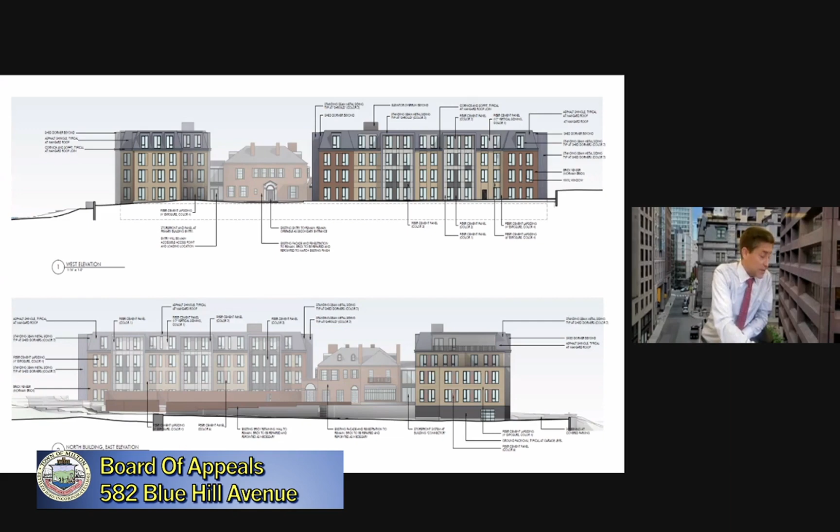Now, Mr. Bomer's suggestion was to cut the ends off of the North Building.

The applicant responded to the first suggestion, but not the second. It determined that cutting the western end of the North Building would result in the displacement of 12 residential units. But instead of simply reducing the size of the building, it is proposed to relocate those units to the West Building.

This means increasing the height of the West Building to 5 stories and adding a story to the eastern end of the North Building, giving it a 5-story exposure presence to the Meeting House Lane neighbors, directly contradicting Mr. Bomer's design comment.

The applicant's proposed changes would do more harm than good, or in the vernacular, rob Peter to pay Paul. Now, neighbor Rob Levash, who is a member of the Vos Hill Group, is a registered professional architect.

He commented on June 7th that both buildings are completely out of scale when compared to the existing historic structure and overall neighborhood context, or the existing residential structures in the neighborhood.

The only sensible solution is to scale back the size of the buildings, something that the applicant has refused to consider on grounds that any reduction in the unit density would be uneconomic.

Curiously, the applicant previously argued that any reduction of unit density below 118 units was uneconomic, but it somehow managed to drop 32 units.

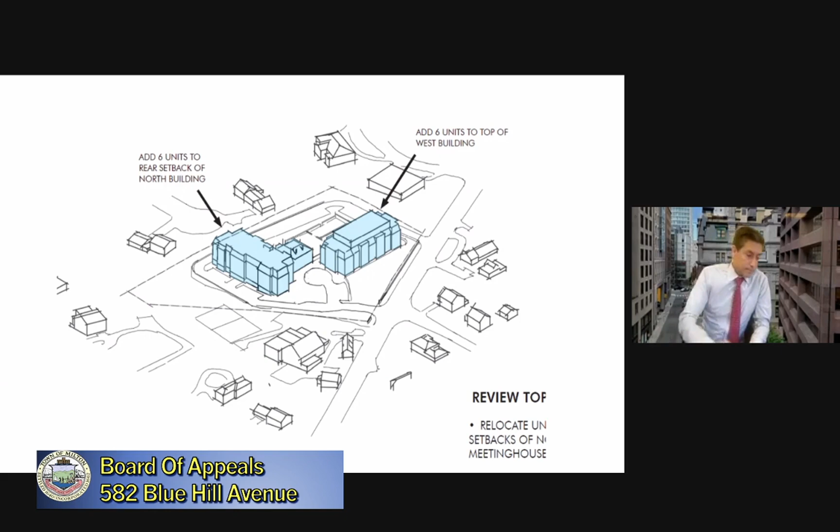Now, the historic importance of the McGinley Estate, and in particular the gardens designed by Ellen Shipman, the quote, Dean of American Women Landscape Architects, and the threat that's posed by the project, compelled a rare conglomeration of alarming comment letters.

These letters came from every important historic architectural organization in Massachusetts, including Preservation Massachusetts, the Society of Architectural Historians, Historic New England, which runs the Eustis Estate here in Milton, the Cultural Landscape Foundation, and the Garden Conservancy.

While acknowledging the gesture that was made by the applicant to preserve the historic residence and gardens in its latest plan iterations, Mr. Bomer commented on June 7th, just a couple of weeks ago.

He said that the current design, quote, buries the historic structure more than 70 feet back from the facades of the new structures, which when combined with the proposed height of the new buildings, seriously diminishes its prominence and places the entry court in shadow for most of the year.

The chair of the Historic Commission echoed that comment and was particularly critical of the applicant's preservation intentions, observing on June 23rd that the house is virtually invisible except from straight in front of it.

The bottom line here is that despite the verbiage of the applicant, the present plan evidences little by way of preservation in the true sense of the word. The building and gardens appear as afterthoughts in the plan, retained in such fashion simply so that they can say they, quote, preserved them.

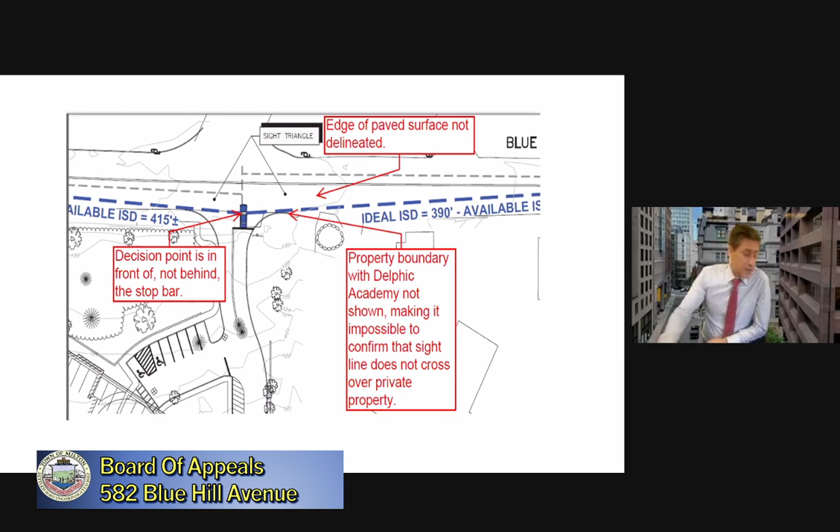However, the auto turn exhibit reveals that as the simulated ladder truck maneuvers the two rear corners, there is no margin for error. The truck barely squeezes past these corners, which are confined by walls. The entire driveway is relied upon as a fire lane, 20 feet wide. That's the minimum under state regs, which, if obstructed for any reason and to any degree, the fire truck will not be able to pass if the fire lane is less than the width of the swept path analysis.

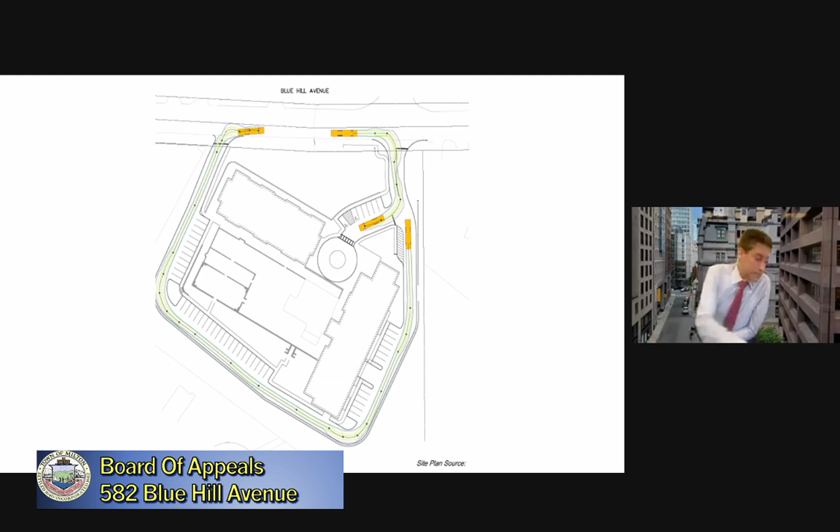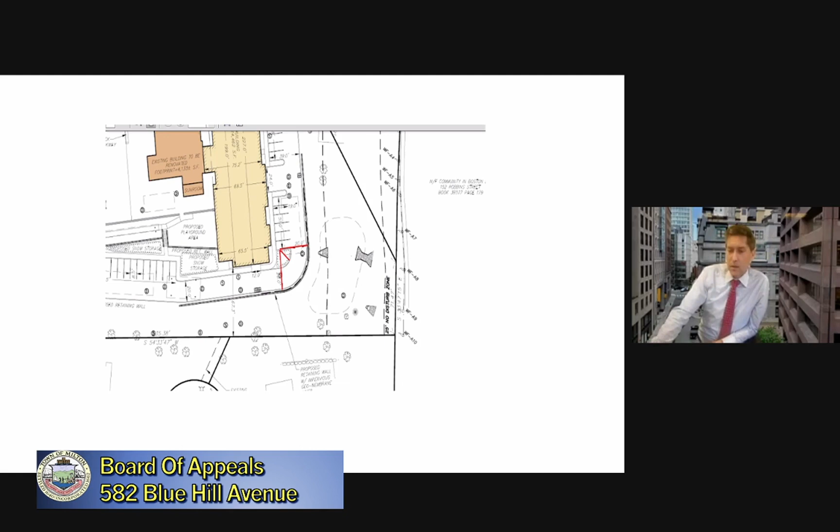Emergency access within the parking garage is still non-conforming to the fire prevention code. Under the code, dead-end fire access roads cannot exceed 150 feet without an approved turnaround area such as a cul-de-sac. Parking lot lanes are considered to be fire lanes under the fire prevention code, and this long lane within the garage is approximately 300 feet from the entrance to the far end of the west building.

There's no turnaround, as you can see, at the end of the garage. The auto turn exhibit did not even analyze the turning maneuver to get into the garage or the inside turning radius. In any event, in the event of a car fire or a fire in the mechanical room or trash room, emergency vehicles will not be able to respond within the garage.

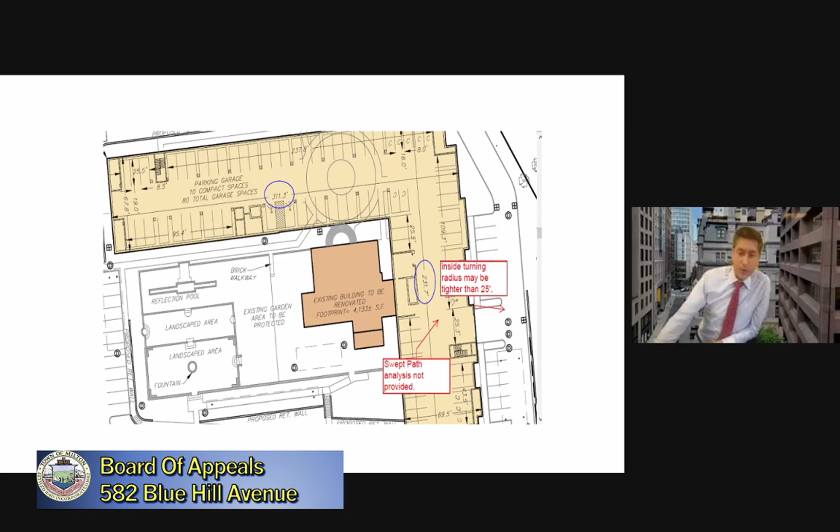According to the applicant's own data, the project site is constrained by relatively shallow groundwater elevations. The site is adjacent to a jurisdictional wetland system comprised of bordering vegetated wetlands and an off-site open channel stream. The revised project design will generate a significant level of stormwater runoff over existing conditions due to substantially greater lot coverage. The applicant proposes a stormwater system that includes a series of infiltration basins, a discharge to a detention basin with an outflow or overflow to the off-site stream, and discharge of stormwater into the municipal street drainage system in Meeting House Lane, which discharges to Pine Tree Brook and the Neponset River.

These data indicate that the proposed infiltration systems are designed to cumulatively recharge 280% more water over the site compared to existing conditions. According to our expert hydrologist, Scott Horsley, this increase in recharge will cause rises in the groundwater levels throughout the site and on adjacent properties. It will also increase base flow to the adjacent wetland stream, constituting an alteration to the wetlands.

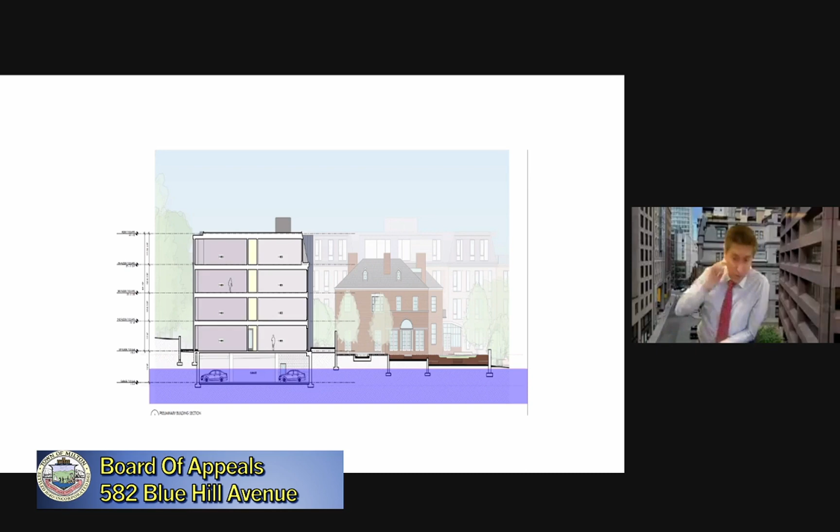That plan violated several state stormwater requirements, including setbacks to walls and foundations. So by late May, the applicant had pivoted again, now proposing 2 discharge points: one in the direction of the open channel stream that runs south to the Alfred Road 42-inch pipe, which ultimately discharges into Trout Brook, and the other a direct connection into a 12-inch drainage system in Meeting House Lane.

The current drainage design, however, is materially flawed in 2 important respects. First, the design relies on hydrogeological assumptions, as previously discussed, that are speculative and unproven. And absent a comprehensive hydrogeological assessment, these assumptions remain speculative and unproven.

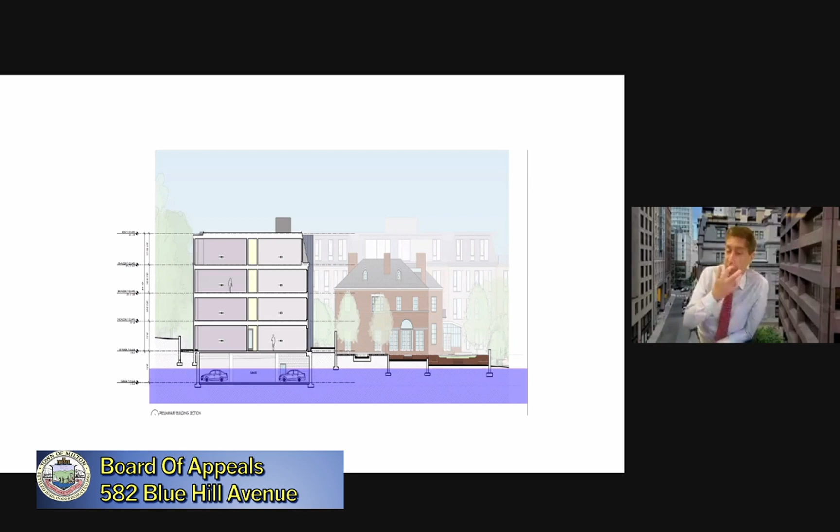The west building foundation is in 12 feet of groundwater, and there's an increase of recharge across the site by 280%. The applicant's plan to attenuate peak flows through on-site detention and infiltration to control for downhill flooding is simply unreliable. Like any predictive modeling exercise, this model is only as good as the assumptions and inputs.

And as Mr. Horsley opined in his letter of May 25th, the applicant's groundwater mounding analysis is incomplete because it does not account for the combined groundwater rise from all 6 proposed infiltration systems and relies on that faulty assumption about the saturated thickness. Finally, Mr...

Bomer aptly noted that consideration should be given to whether the groundwater displaced from the construction of that west building will interfere with the functioning of the infiltration systems. These systems rely on having at least 2 feet of separation from groundwater, and it is possible that the groundwater elevations will change across the site once that garage is installed.

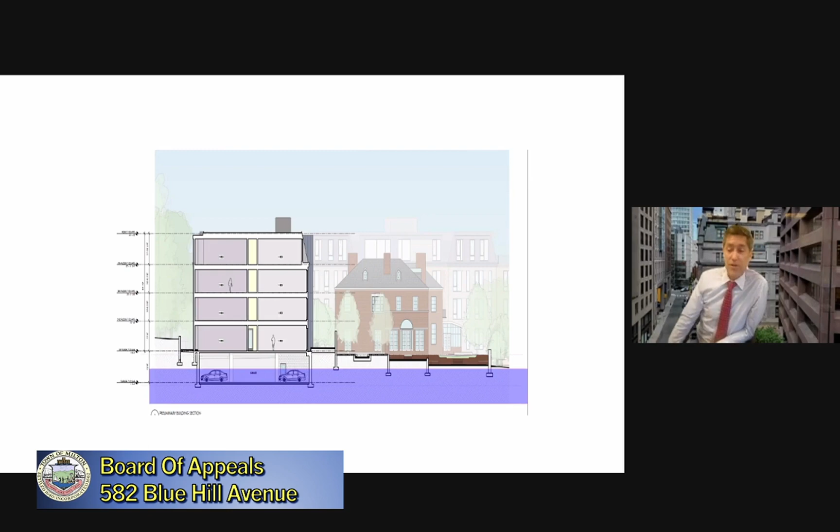Second, the project's drainage system now relies heavily on off-site drainage systems that ultimately discharge into the brooks. This is problematic as the applicant's civil engineer, Mr. Burke, has acknowledged that both the open channel stream and the Meeting House Lane Alfred Road systems are undersized and

are surcharged under current conditions. Our engineer, John Chesia, has reviewed the offsite drainage infrastructure report that was prepared by Mr. Burke and found that by Mr. Burke's own calculations, there will be large increases in both peak rates and volumes of runoff leaving the project site and entering the Meeting House Lane drainage system as compared to existing conditions. His findings are summarized in a letter that we filed yesterday.

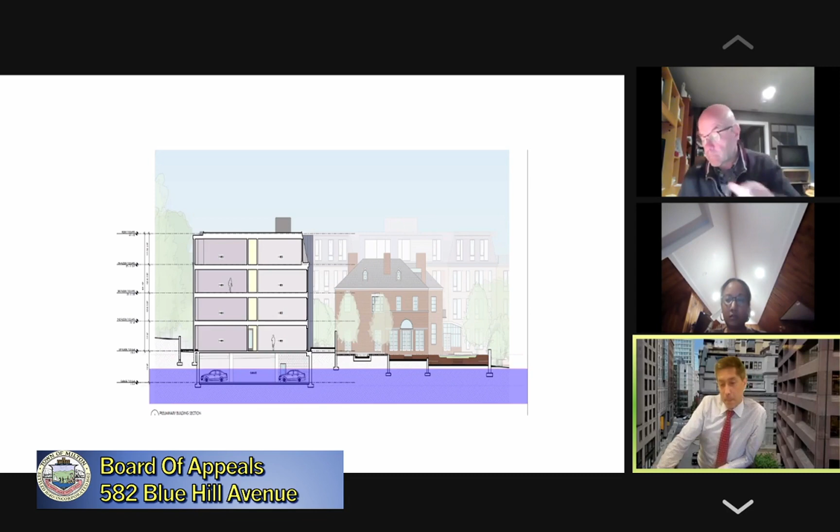Now, Mr. Burke suggests on page 7 of his report that peak rates of flow will decrease under post-development conditions. And Attorney Schomer had stated the same conclusion in his letter dated June 22nd. All of this is an attempt to demonstrate compliance with state stormwater standard number 2 and to allay concerns that the project will potentially worsen the already untenable flooding conditions in the neighborhood.

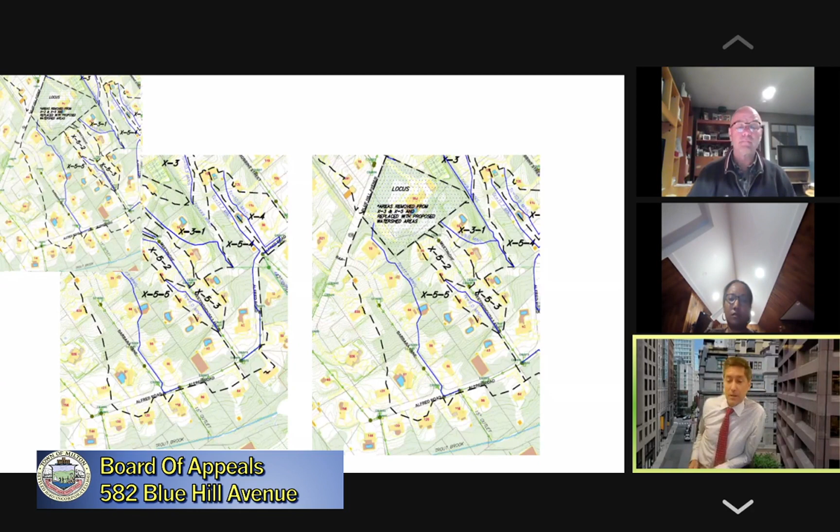It can be mitigated by further modulating the rate of flow into Meeting House Lane, by perhaps building more storage volume into the design of the project. The project could incorporate more low impact development principles that disperse the discharge of runoff offsite. And most fundamentally, it could reduce the lot coverage in impervious surfaces in the project, thereby reducing the demand on the stormwater system.

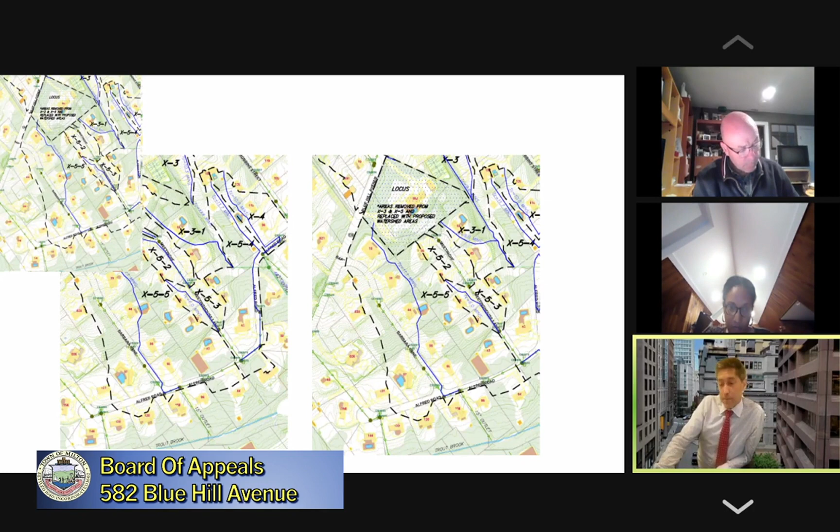That requires all development projects to comply with the state stormwater standards. It stipulates that the town cannot allow new stormwater flows into already impaired water bodies, such as Pine Tree Brook. And this project is far from demonstrating compliance with that requirement. The applicant has provided no information as to whether the excess runoff has or will end up in the wetlands or the stream when it bypasses the surcharge drainage system in Meeting House Lane and Alfred Road.

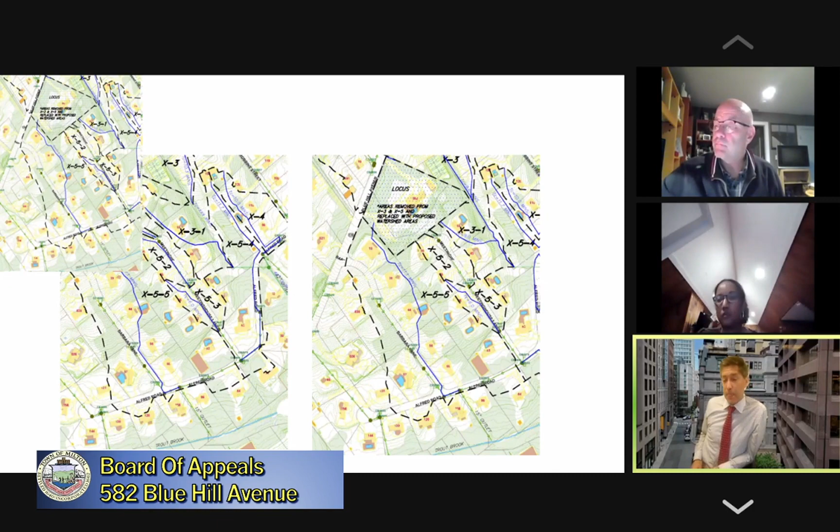Now, finally, I'd like to address, Mr. Chairman, some process recommendations. You mentioned earlier tonight that we need to look at waivers, and I support that. At this stage of the public hearing, it is customary for zoning boards to consider the waiver requests in light of all the testimony and other evidence that's been collected by the board on the issues that are germane to the waivers being sought. Indeed, Attorney Schomer stated in his letter to the board on January 29th that the board could request the applicant to prove that any waiver denials, or even just partial denials, would render the project uneconomic pursuant to the process that's outlined in the regulations.

Since the evidentiary burden in appeal is on the developer, the initial burden is on the developer to prove the uneconomic effect of the board's conditions or waiver decisions. It is logical for the board to want to know before it closes the hearing whether the applicant would have a reasonable ground to appeal in the event that the board imposed restrictive conditions or denied waivers.

I would suggest that we're at that point right now. The applicant has made it clear that it intends not to make any more substantive changes, as Mr. Schomer stated. They're minor tweaks at this point to the design. Therefore, it would be logical for the board to spend some time at the next session of the hearing to review each waiver request and to give the applicant an opportunity to defend these requests, and to allow interested parties, including town officials, to offer their opinions.

As I noted, the neighbors will produce a written statement with our recommendations on these waiver requests and on substantive conditions that would address the local concerns raised by the project. That wraps up my closing argument, so to speak.